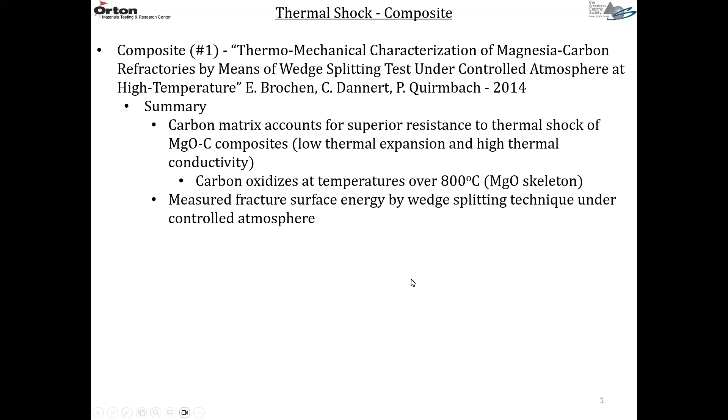These are the carbon matrix composites, and they've been designed to improve thermal shock resistance and corrosion resistance, two of the biggest problems in the refractory industry. So these are really superior materials.

I have three papers today I'd like to go over. The first one is thermomechanical characterization of magnesia carbon refractories by means of wedge splitting tests, under controlled atmospheres as a function of temperature.

This paper is taking the wedge splitting test and adapting it to high temperatures. Basically, these carbon matrix composites have superior resistance to thermal shock. This one I'm looking at today is an MgO carbon composite, which is the primary lining for a lot of steel vessels, especially basic oxygen furnaces. These materials have low thermal expansion and high thermal conductivity. Both of these characteristics give good thermal shock resistance. The problem with these carbon matrix composites is carbon oxidizes at high temperature.

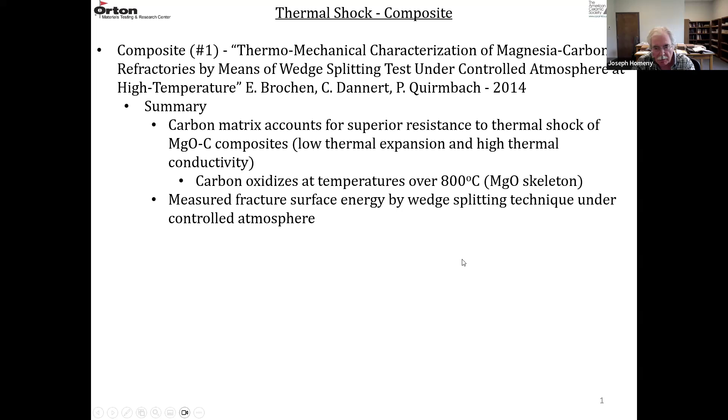This was the chemistry of the material that was looked at. It's about a 96% MgO material—that's the chemistry of the oxide. The loss on ignition indicated there was 13% carbon present, as delivered. The carbon is usually a combination of flake graphite and resin, which is usually a phenolic resin.

This is after the wedge splitting test, at 1500 degrees C. The chemistry is the same for the oxide components, but the loss on ignition is a little bit lower, 10%. So testing at 1500 degrees C is basically coking the material—you're pyrolyzing the phenolic resin binder. There's a little bit less carbon present because of the pyrolysis of the resin.

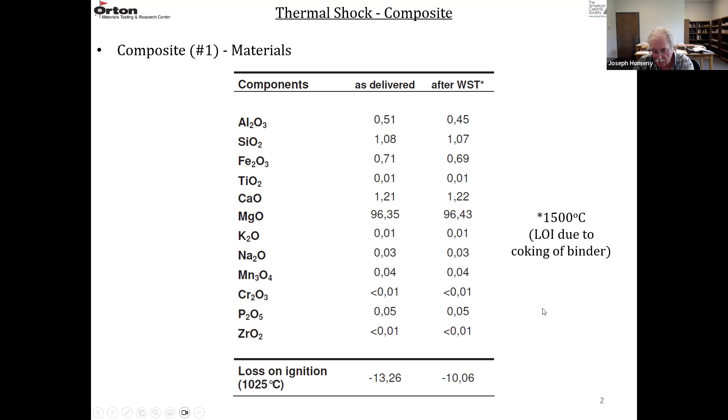The phenolic resin usually has about a 50% carbon yield, so there's usually 5-6% resin in these materials. It lost about 3% during the pyrolysis process. My guess is there's 3% amorphous carbon from the phenolic resin and about 7% flake graphite in this material.

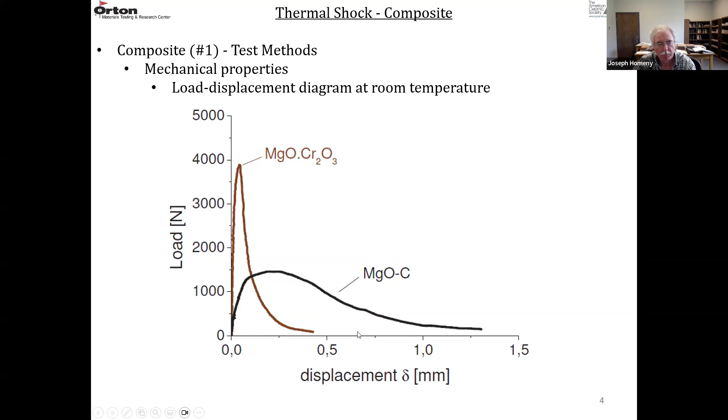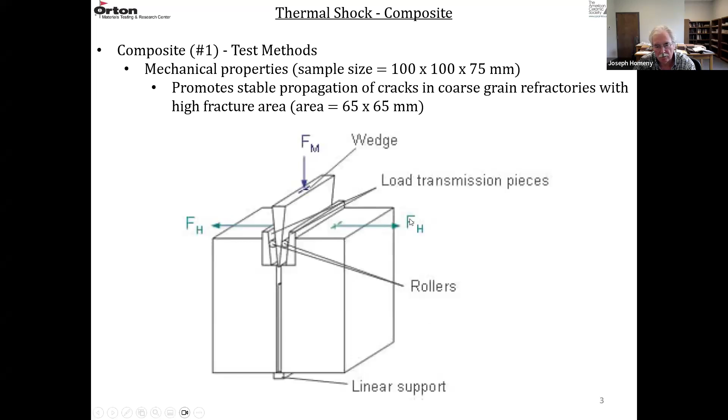So again, the formula for the fracture surface energy, GF, is just 1 over the area, and it's the integral over the force displacement curve—F delta, D delta. F is the horizontal force, delta is the horizontal displacement. So F is this horizontal force.

At room temperature, to get the horizontal displacement, you just use a displacement transducer that monitors the crack opening. Obviously you can't do that at high temperatures because the transducer is not suitable for use at high temperatures.

So in this work, for the elevated temperature test, the wedge sample is put in a furnace. On opposite faces of this furnace there are windows, high temperature windows, most likely a fused silica material that's transparent, or a sapphire single crystal alumina that's transparent. You have to control the atmosphere—it has to be a non-oxidizing atmosphere like nitrogen or argon. You don't want to oxidize the carbon.

And then you can get that horizontal displacement from an optical dilatometer, which can monitor the crack opening as you load the material.

In this work at the lower temperatures, they use a halogen lamp that illuminates the sample and it casts a shadow against the light source, and a high resolution camera records the movement of the shadow. At higher temperatures, where there's enough radiation to see the sample, you don't need the halogen lamp, and you use the radiation of the sample to record the displacement with a high resolution camera.

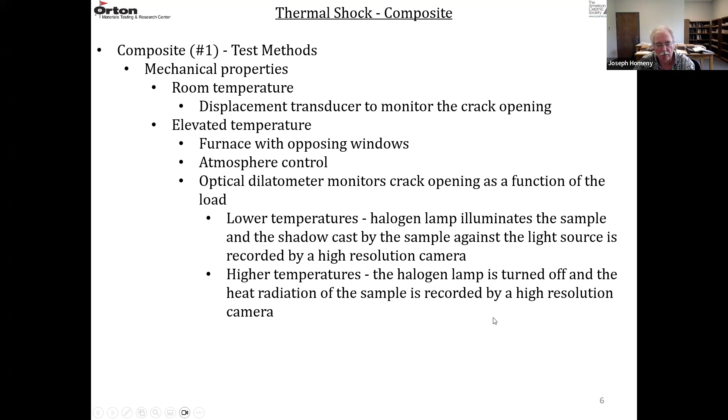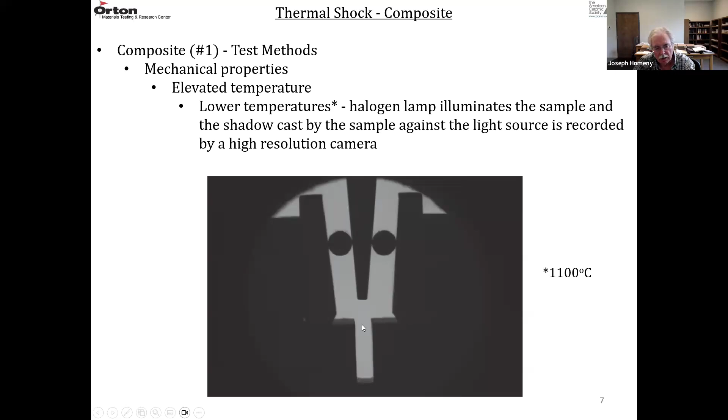So at the lower temperatures, probably less than about 1100 degrees C, the halogen lamp illuminates the sample, and the shadow that's cast is recorded by a high resolution camera. You can see the loading wedge, the cylinders, the transmission wedges, and the notch. As the load is applied, you can get the displacement, the crack opening displacement.

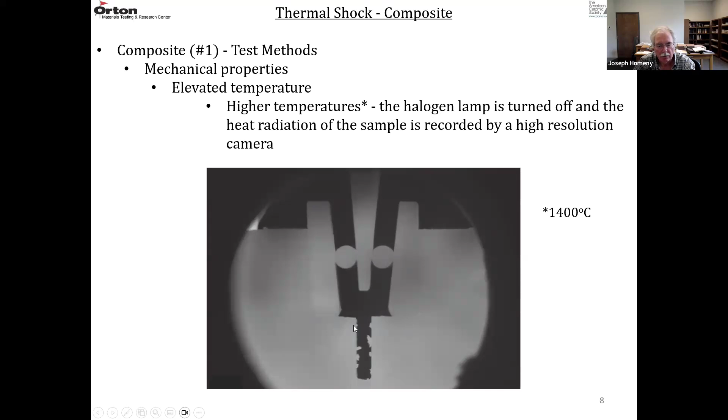Then at higher temperatures, greater than 1400 degrees C, you don't need the halogen lamp, since there's enough heat radiation to see the setup. So this is what you see at higher temperatures. Again, you can see the wedge, the cylinders, the transmission wedges, and the crack. So you can monitor the delta, the crack displacement as you load it.

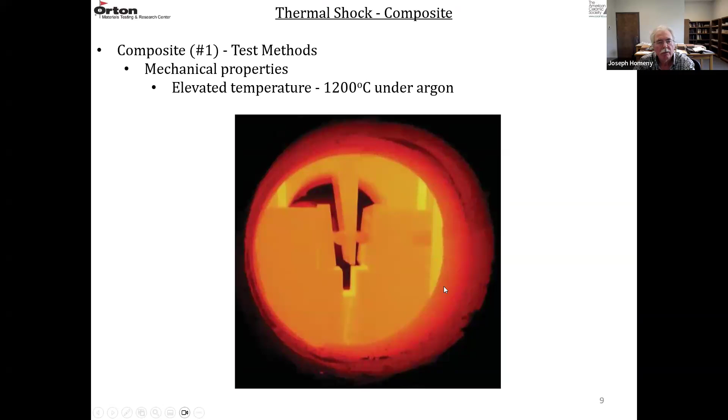This is what the sample looks like at high temperatures, looking through one of the windows in the furnace, a circular window. This is 1200 degrees C under argon. You can see the wedge, the cylinders, the transmission wedges, and the notch. You can actually see a crack that's been propagated from this starter notch.

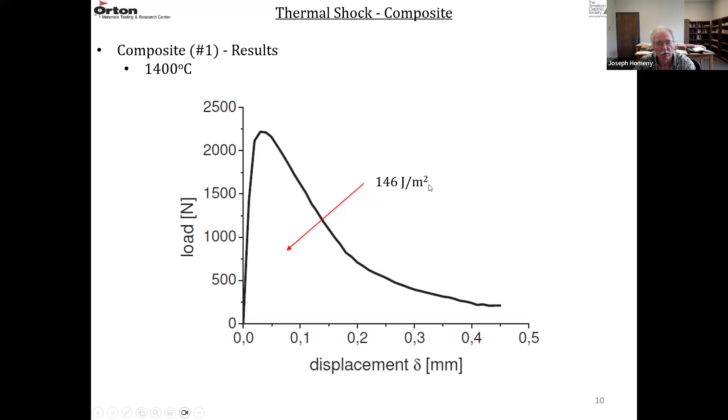So I just showed you this test method, the wedge splitting technique, how it can be used at elevated temperatures for these carbon-based materials. They measure fracture surface energy by wedge splitting under controlled atmosphere up to 1500 degrees C. And we talked a little bit about the pyrolysis of the phenolic resin. If you pre-coke the sample, you can pyrolyze the resin and then you won't have any loss on ignition during the testing.

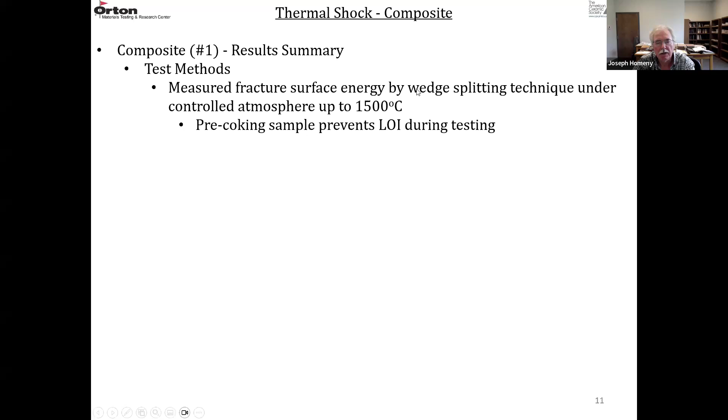So you can do the same type of testing for work of fracture, the chevron notch type sample, but you're also going to need a furnace with a controlled environment.

So I have two other papers today. One shows the influence of the graphite content on the thermal shock. The other one is going to show the influence of the particle size distribution of the oxide. So this one is mechanical behavior and thermal shock resistance of MgO carbon refractories, and we're going to look at the influence of the graphite content. This is a relatively new paper, 2017.

So the thermal shock resistance of an MgO carbon refractory was investigated at different flake graphite contents. They used the wedge splitting test to get the fracture surface energy, and then did some fractography to characterize the crack propagation paths. The thermal shock resistance was correlated to this fracture surface energy measured by the wedge splitting test.

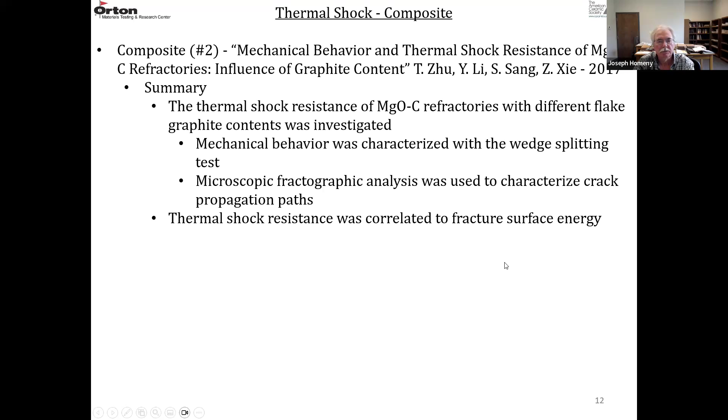So there were several specimens here as a function of graphite content. This is the formula: they have fused magnesia, of course as aggregates, then a finer magnesia powder. The aggregates were kept constant at 70%. The magnesia powder decreased from left to right, and the flake graphite content replaced the magnesia powder.

So we're always looking at a 27 weight percent combination of magnesia powder and graphite. SG1 has 1% graphite and 26% magnesia powder, and then we get up to SG14, that's 14% graphite, and the magnesia powder is reduced to 13%. So 1, 5, 10, and 14% were the flake graphite contents.

There was 1% silicon metal added and 2% aluminum metal, so these are additives. These are anti-oxidation agents, basically oxygen getters. They're there to prevent oxidation of the carbon. Theoretically, they react with the oxygen present before it can react with the carbon.

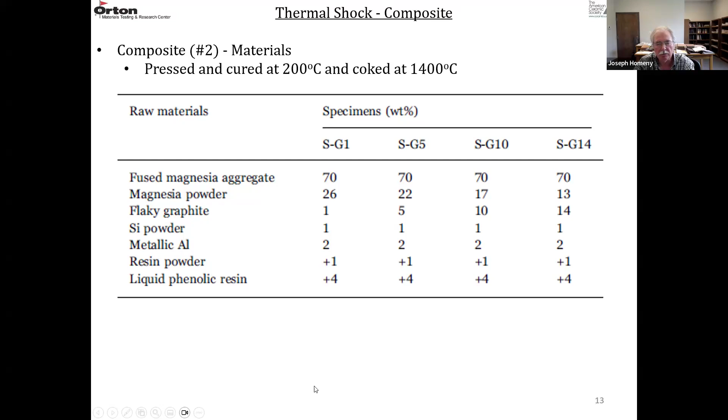Thermal expansion was measured from room temperature to 1400 degrees C, and that has to be done in an inert atmosphere like nitrogen. These were 10 millimeter diameter by 50 millimeter long cylinders. Then the fracture surface energy was measured with the wedge splitting test using the normal size block, 75 by 100 by 100 millimeters.

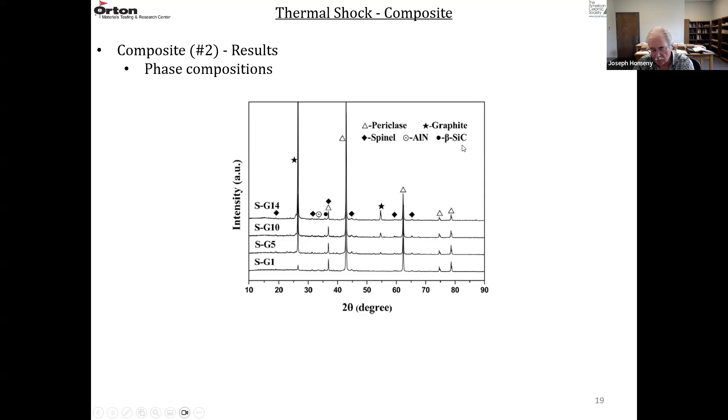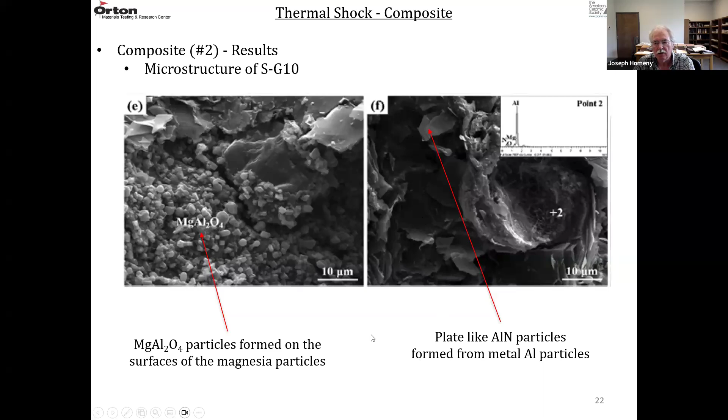You can also see some aluminum nitride platelets forming, and again, this is the EDS analysis showing that these plates are aluminum and nitrogen.

And then the last one, SG14, again, they're showing areas of spinel. Here's an aluminum carbide area, pretty much in whisker form, aluminum carbide whisker.

So again, the spinel is forming on magnesia particles, and here's some more aluminum nitride. This area here is blown up, and you see these plate-like structures of aluminum nitride.

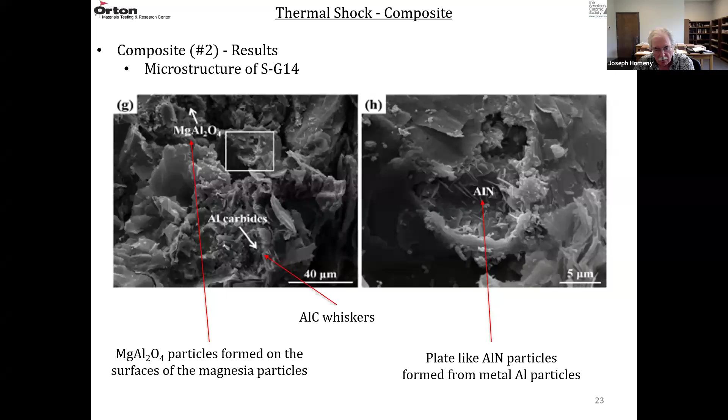So these micrographs are just pointing out the minor phases that are present.

And when they run the wedge splitting test, this is the horizontal force versus the horizontal displacement. You have this nonlinear fracture behavior that becomes more nonlinear as the graphite content goes up. So this is SG1, SG5, SG10, and SG14. So the higher the carbon or graphite content, the lower the strength, but the bigger the area under these load displacement curves, and the more nonlinear the behavior becomes with higher graphite content.

So SG1 is pretty linear. It's the most brittle. And then SG14 is the most ductile or the most nonlinear. So these curves really change as you increase the graphite content.

So just looking at these curves, you would say going from G1 to G5 to G10 to G14, in that order, those should be more thermal shock resistant as you go up in graphite content.

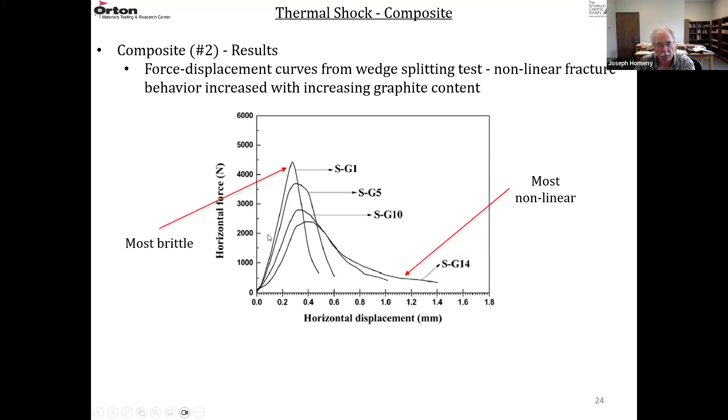And then this is common, the fracture surface energy divided by the sigma NT, this notched tensile strength. So that ratio is shown here, plotted against graphite content. It increased with increasing graphite content. So the higher this ratio, the higher the ratio of the fracture surface energy to the tensile strength, the lower the brittleness, the higher the toughness, the better the thermal shock resistance.

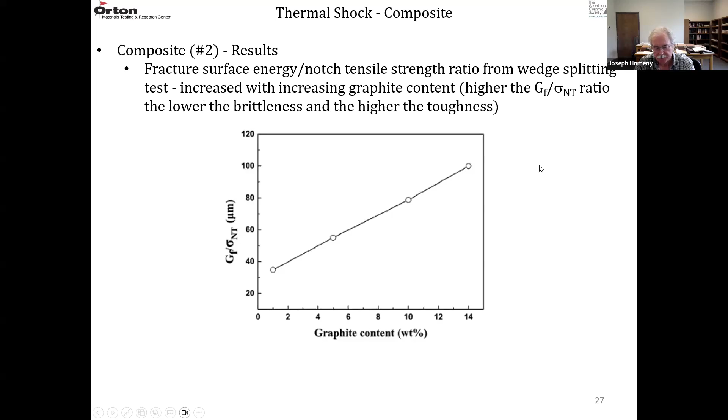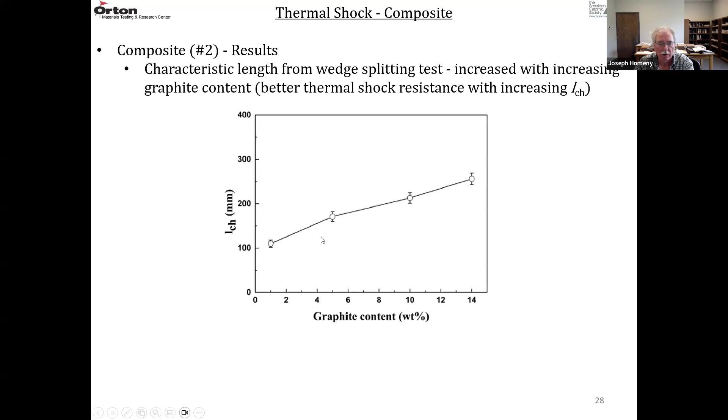They also plotted the characteristic length from the wedge splitting test, and again, that increased with the increase in the graphite content. So the higher the LCH, the higher the characteristic length, the better the thermal shock resistance. And that's following R4 prime.

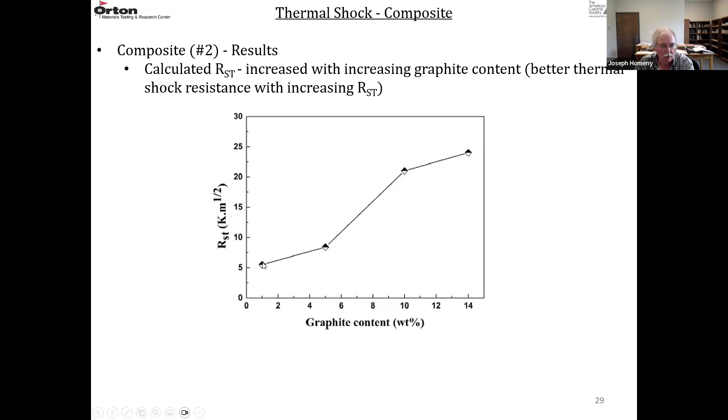They also calculated RST, and they showed that RST increased with increasing graphite content. So the higher the value of RST, the better the thermal shock resistance. So all of these tests are showing that the material with the highest graphite content, 14%, should have better thermal shock resistance compared to the material that is only 1% graphite.

So this is the thermal shock test results. You have room temperature bend strength before and after thermal shocking, and the residual strength ratio is also shown. So cold MOR before and after shocking. The darker cross-hatched area is the cold MOR before thermal shocking, and this lighter single line area is the cold MOR after thermal shocking.

So you can see that the lower graphite material was stronger before thermal shocking, but actually the higher graphite material had a higher residual strength, just slightly higher than these other materials at lower graphite contents.

So this is the residual strength ratio, this plot here. So the higher residual strength percentages are at the higher graphite contents. This upward trend is the same trend as with LCH, RST.

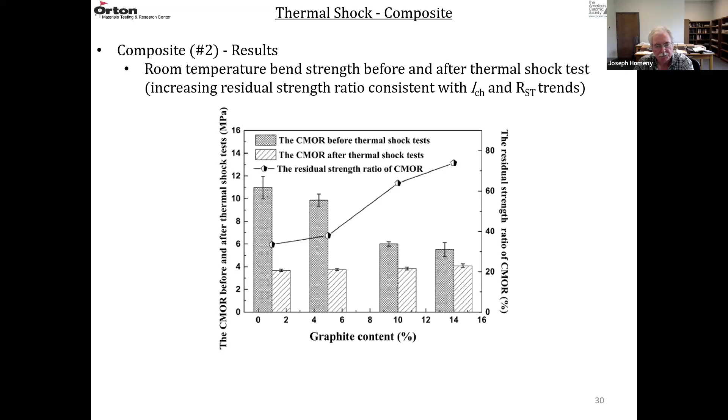What matters is that after thermal shock, it still retains most of its strength, that's still there in service. So this is the material.

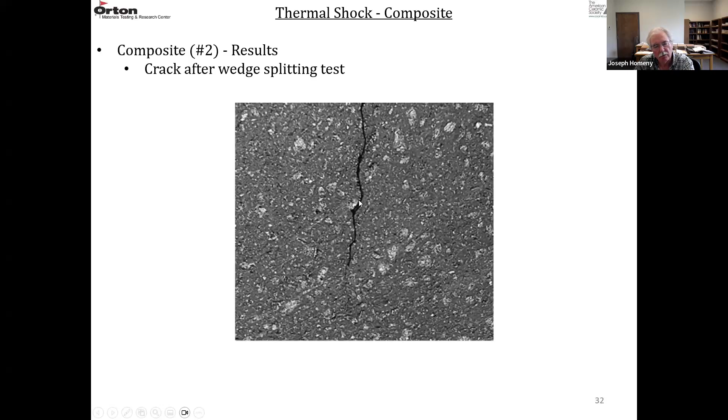This is a higher magnification of that crack that's growing. You can see there's some deviation from linear behavior. There's a MgO aggregate that went around. And then they modeled this.

So they took an image of this crack, its crack path, and they used a fractal analysis of that crack image. And they got a fractal dimension D. That fractal dimension D describes the behavior or nature of that crack path. So the higher the value of this fractal dimension D, the more tortuous the crack propagation path.

The higher the D value, the more tortuous the crack path, it should have higher thermal shock resistance, the higher work of fracture. So D increased with increasing graphite content. So that predicts better thermal shock resistance with increasing D. This is that fractal dimension D versus graphite content, and it increases with graphite content, meaning that crack path is more tortuous. And the more tortuous the crack path...

You do that by controlling the microstructure, the better the thermal shock resistance.

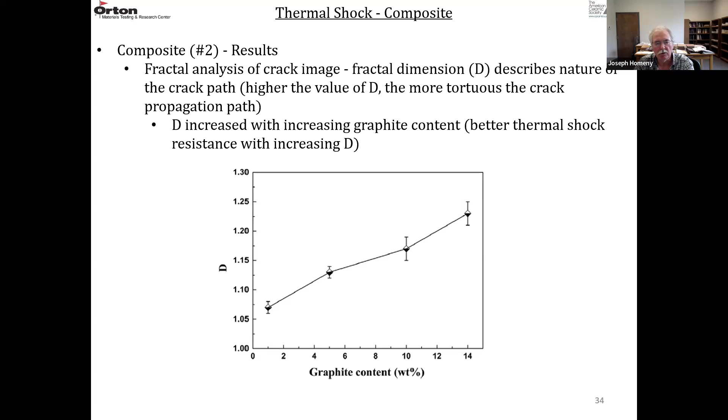So they looked at the crack propagation types. You can have crack propagation within a grain, within an MgO grain. They label that CGG. You can have crack propagation between the grain and the matrix. They label that CGM. And you can have propagation of cracks in the matrix. That was CMM. So GG is in the grains, GM is at the interface, and MM is in the matrix.

And then they looked at the length in the whole crack propagation path for each one of these types of crack propagation behaviors. So they had a capital L CGG, a capital L CGM, and a capital L CMM. This was propagation within grains, propagations at the interface, and propagation in the matrix.

And then they got a percentage here, the corresponding proportions of each one of these crack paths relative to the whole crack path. So small l is the portion of the crack that went through coarse grains. This small l GM is the portion of the cracks that went through the interface. And this small l MM is the portion of the crack that went through the matrix.

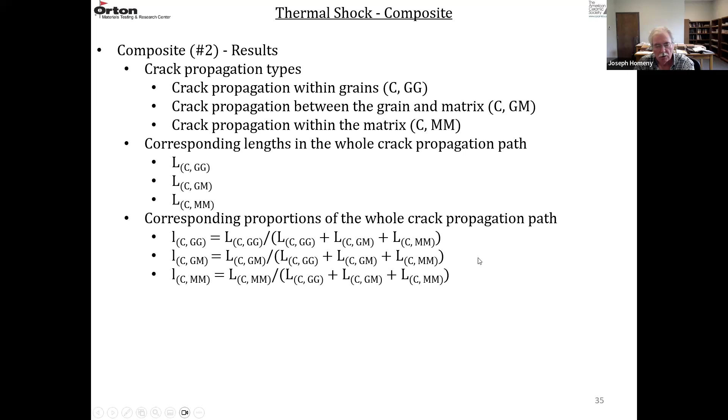So this is just the sum: capital L GG, capital L GM, capital L MM. So this is the total length of the crack. And then this is the length of the crack that was through the coarse grains. This is the length through the interface. And then this is the length through the matrix. So they were able to look at how this crack was moving through the material.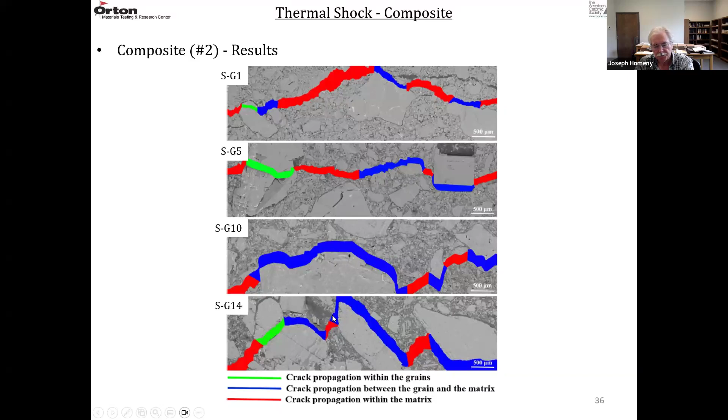So they looked at these values here: the proportion in the coarse grains, the proportion in the interface, and the proportion in the matrix for all 4 of these. So the crack propagation path became more tortuous as the graphite content increased. So this is in the coarse grains. SG1, 6 or 7% of that crack path was through an MgO grain. But if you go across the higher graphite contents, it's down to 2.8%.

And then through the interface, it starts out at 35% with the SG1, but as you go across this table to the higher graphite, it's now up to about 73%. So a totally different fracture path in the SG14 compared to the SG1. And then the matrix, it was 58% SG1 and it decreases to 24% in SG14.

Then they made a ratio of the interface relative to the coarser grains. And that ratio increases from SG1 to SG14. So what is that telling you? In the high graphite content material, the interface is really important.

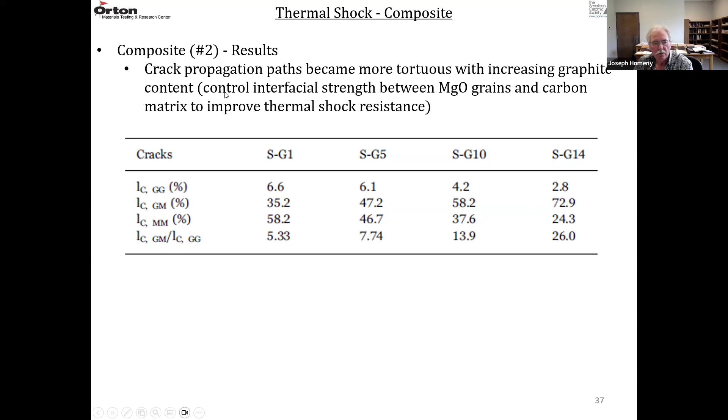So you can try to control the interfacial strength between the MgO grains and the carbon to improve the thermal shock resistance. So that's one of the key findings here, is that you want to control that strength, because that's the main crack propagation path. So if you have a very strong interfacial strength between the matrix and the MgO grains, that path is not going to be that active. If you have a weaker interface, that fracture path will be more active. So you want to control that interfacial strength.

So the summary of this experiment: increased graphite content enhanced the irregularity of the crack propagation path. It made a more tortuous fracture path, and that improved the thermal shock resistance because of this more tortuous propagation path.

As far as the test methods, as you increase the graphite content, you increase the nonlinear fracture behavior, you increase the ratio of fracture surface energy to tensile strength, you reduce the tensile strength, you increase the fracture surface energy, you increase the characteristic length LCH, basically R4 prime, and you increase the thermal shock damage parameter RST.

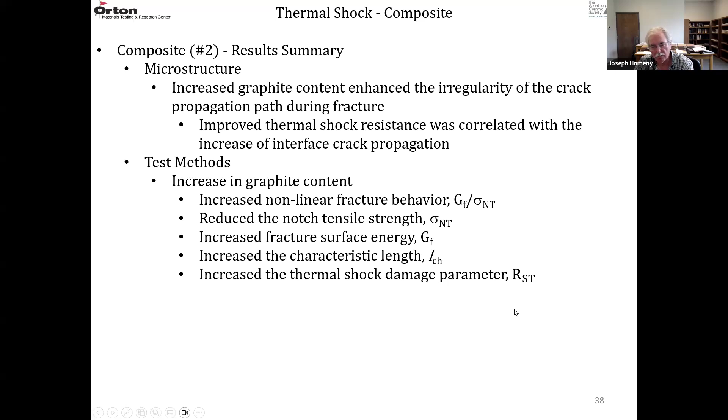So that was a study showing the effect of graphite content on thermal shock behavior. This other paper I picked shows the effect of particle grading on the fracture behavior and thermal shock resistance of these MgO carbon composites. This is a 2022 investigation.

They looked at the thermal shock resistance of an MgO carbon refractory with two different particle size distributions, a fine distribution and a coarse distribution. They used the wedge splitting test to measure the mechanical behavior, but also added digital image correlation of the fracture pattern and acoustic emission, trying to characterize the fracture behavior in more detail.

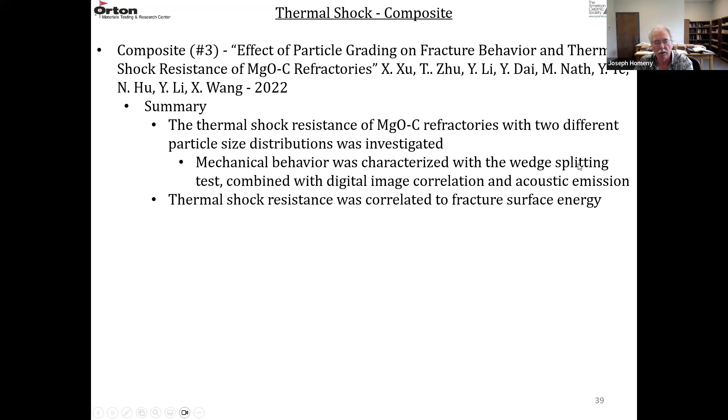And they correlated the thermal shock resistance to the fracture surface energy from the wedge splitting test. So they had two compositions, the C12 and an MC12. The C12 was the coarser distribution, the MC12 was the finer grain size distribution.

They used fused magnesia, a dense, low porosity magnesia at three different particle sizes: 3 to 1 millimeter, 1 to 0.2 millimeters, and 0.2 to 0 millimeters. The flake graphite was 100 mesh.

They added aluminum metal as an oxygen getter, an antioxidation agent. They also added B4C, which is also an antioxidation agent, but it works a little differently than the metallic antioxidation agents.

The B4C oxidizes and leaves a B2O3 glass, which coats the carbon and acts as a diffusion barrier. Obviously, if you create a glass, you lower some of the mechanical properties. So in a way, this is a good oxidation barrier, but it does lower the strength.

The resin was a phenolic resin, a powder and liquid proportion at 4.5%. The flake graphite content was 12%, constant. The antioxidation agents were constant: 3.75 for aluminum metal and 0.5 for boron carbide.

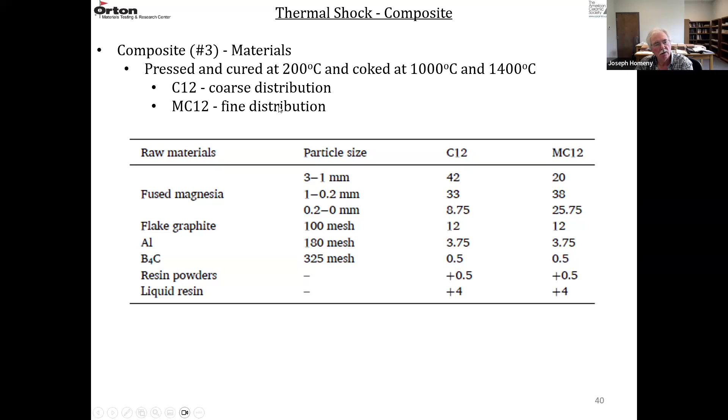They used a 3-point bend strength test, typical bend bar size, 25 by 25, 140 millimeters. They measured Young's modulus by a resonance technique. Thermal expansion was measured up to 1,400 degrees C under nitrogen with smaller cylinders, 10 millimeters by 50 millimeters long, 10 millimeters in diameter. And the fracture surface energy was by wedge splitting on the typical sample size.

But they use digital image correlation, so they monitor the initiation and propagation of cracks on the surfaces of the wedge splitting block. They also use acoustic emission, which detects the crack location, crack mode, and damage evolution as the sample is loaded and as the crack propagates.

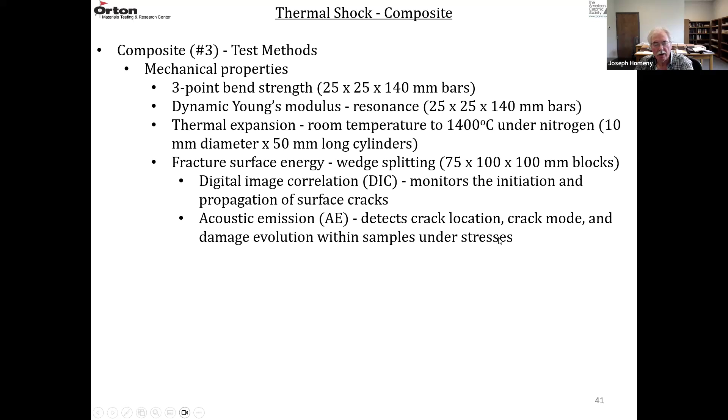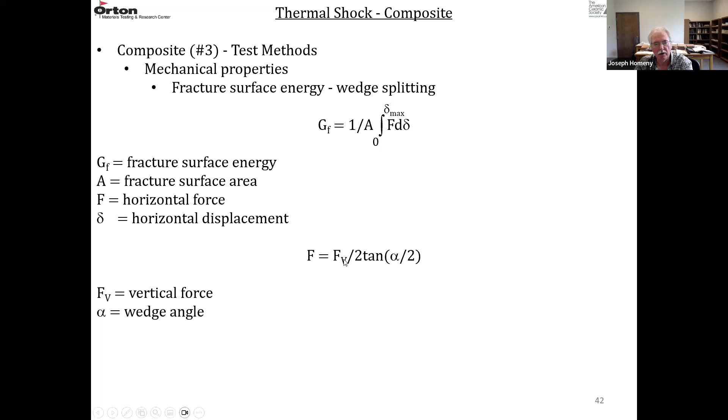I'm just reviewing these equations again. This is the wedge splitting fracture surface energy, GF, equal to 1 over A times the integral of F d delta. And F here, emphasize that it is the horizontal force, while FV is the vertical force when you apply the force of that wedge. So F is calculated from FV, the vertical force, divided by 2 tangent of alpha over 2, where alpha is the wedge angle.

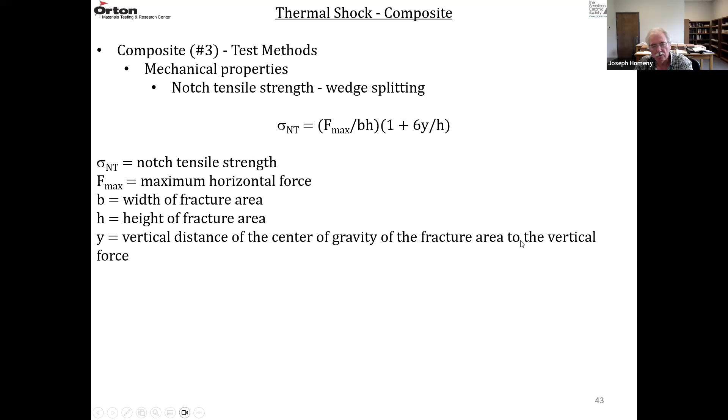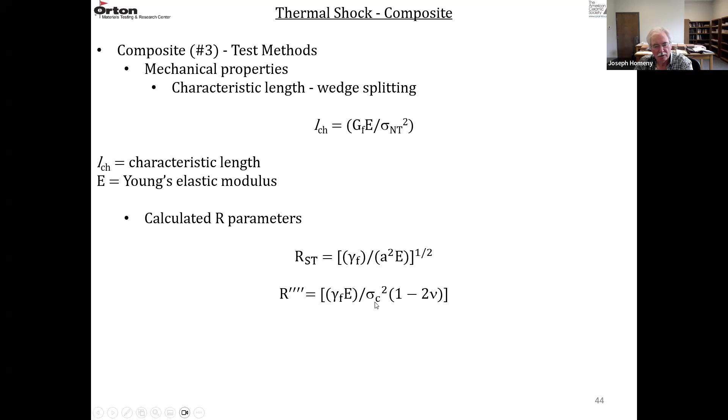And then again, LCH, the characteristic length, is GF times E over sigma NT squared. And that's basically your R4 prime parameter.

These bars that were subjected to thermal shock were the ones that were coked at 1,400 degrees C, so the phenolic resin is pyrolyzed into carbon.

Typical quenching conditions: 900 degrees C to an oil bath at 20 degrees C. Samples cycled 5 times, and then the bend strength was measured to monitor the damage.

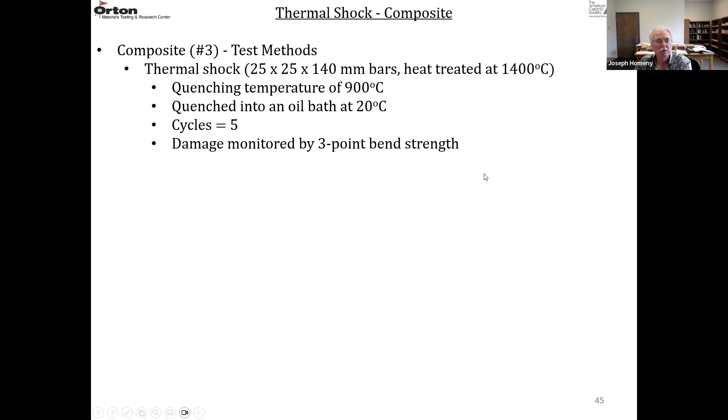The boron carbide was too low a level to detect at the 200 degrees C curing. And then the MC12 is basically the same, primarily periclase and graphite at either curing temperature, some aluminum metal at 200 degrees C curing, and then you're going to get a little aluminum nitride and spinel at the 1400 degrees C curing.

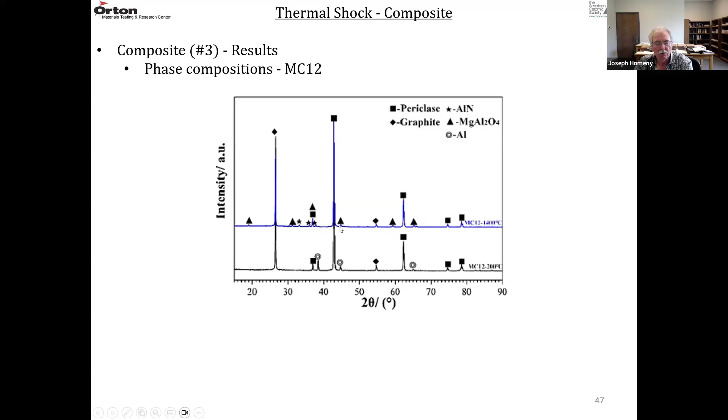And pretty much the same thing for MC12 at 200, 1400, and 1400. You can see the flake graphite. There's some aluminum metallic spheres here.

The aluminum nitride whiskers that have formed, the spinel that has formed, and this is just another micrograph of more spinel that's forming. These are identified with EDS, so these features you can see the chemistry and identify what they are.

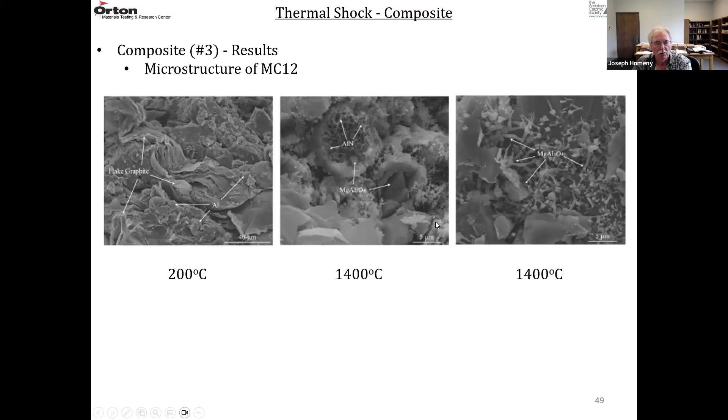So as you go up in temperature, the strength decreases, but the material becomes less brittle, more ductile, and then these areas under these curves start to increase. So the nonlinear fracture behavior increased with increasing temperature.

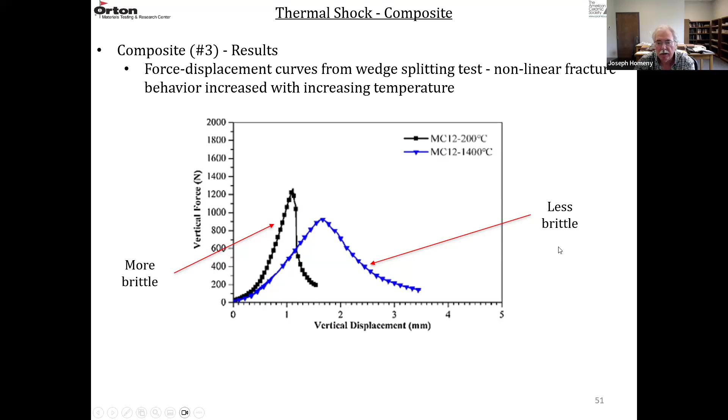And the same behavior for MC12. The black is at 200 degrees C curing. The MC12 in blue is after 1400 degrees C curing. So at room temperature, these tend to be more brittle, and as the temperature increases, they become less brittle or more ductile. So the more ductile they become, the more strain they can take, and the better they can resist thermal shock.

So this is the porosity and density. AP is the apparent porosity, BD is the bulk density. This is the curing temperature, 200, and this is the other curing temperature, 1400 degrees C.

So C12 and MC12, both 5.5%, 6% porosity at 200. And then the bulk density is basically the same, about 3, and that's grams per cubic centimeter. And then at 1400, the porosity, this is 10.5, this is 11, they're almost identical, and the bulk densities 2.88 and 2.87 are almost identical.

So when you cure this from 200 to 1400, you pyrolyze the phenolic resin. You have let's say a 50% carbon yield, then you have a 50% loss on ignition of that resin. So the porosity goes up, from about 5 to 10, 6 to 11, and then the density drops from about 3 to 2.88 and about 3 to 2.87. So the pyrolysis step or the coking step increases the porosity and decreases the density.

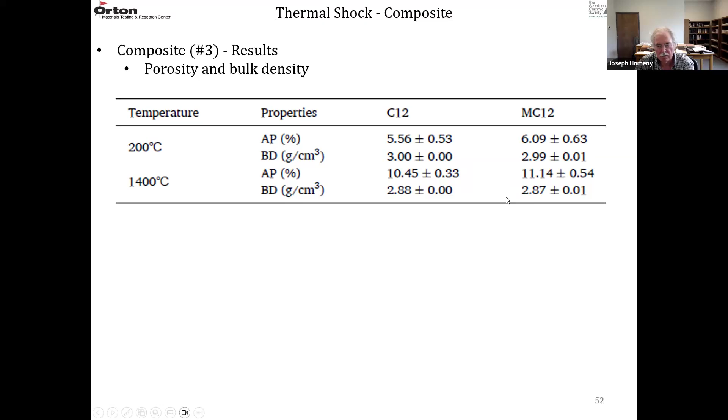So these are the results from the wedge splitting test. So the increase in heat treatment temperature from 200 to 1400 resulted in an improvement in the predicted thermal shock behavior.

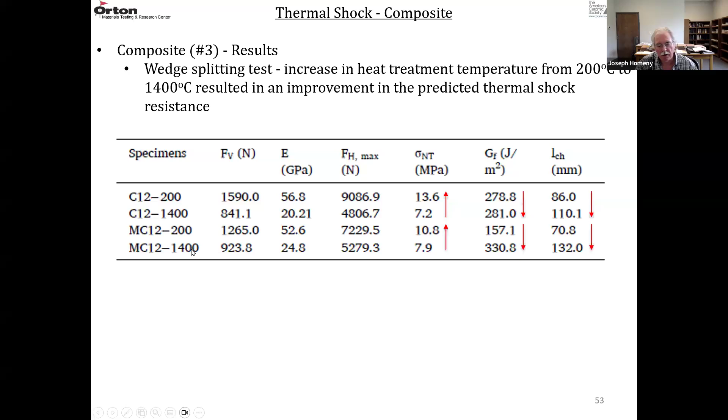So they're stronger before they're coked, but the fracture surface energy increases after coking. This one is a slight increase, but for the finer aggregate material, it almost doubles. So the fracture energy really goes up at the higher curing temperature for the finer aggregate size material. The characteristic length also increases as you raise the curing temperature from 200 to 1400. This one's pretty modest, 86 to 110, but this one again almost doubles, 70 to 132. So this is saying that MC12, the finer grain size distribution, should have better thermal shock resistance.

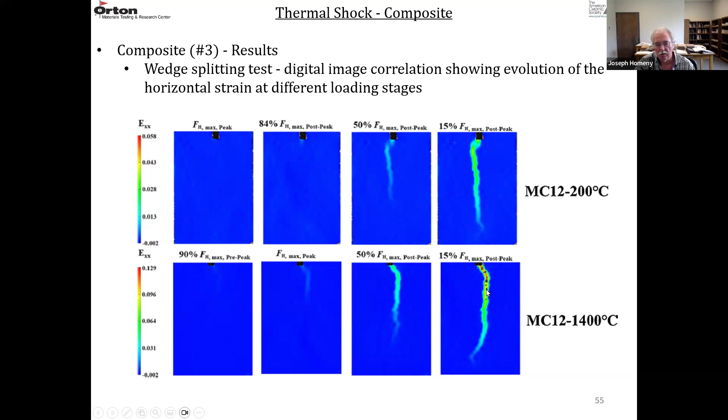That was at 200 degrees C. This is at 1400 degrees C, and you can see the crack path is kind of tortuous, not linear at all. This is the evolution of the crack in the MC12 material at 200 and 1400 degrees C. Again, here are the peak levels, and here's where the crack starts to grow after the peak. Down to 15% load, you can see the crack patterns.

So these digital images give you the horizontal strains. The higher the strain, the better the thermal shock resistance. The more strain the material can take under stress, the lower the amount of damage that takes place. So these are samples, C12 and MC12 at the two different curing temperatures, 200 and 1400 degrees C. This is at 90% of the pre-peak load, 94% of pre-peak, at the peak, 94% post-peak, 84% post-peak, 50% post-peak, and then 15%.

So if you look at these numbers, the strains: this is 1.29 times 10 to the minus 1, this is 1.12 times 10 to the minus 1. These are pretty large strains post-peak on the samples cured at 1400 degrees C. The strain is a little bigger in the finer material. Then there's a lot less strain: 5.84 times 10 to the minus 2, 4.17 times 10 to the minus 2. These are for the 200 degree C cures. So coking the material at high temperatures increases the amount of strain to failure.

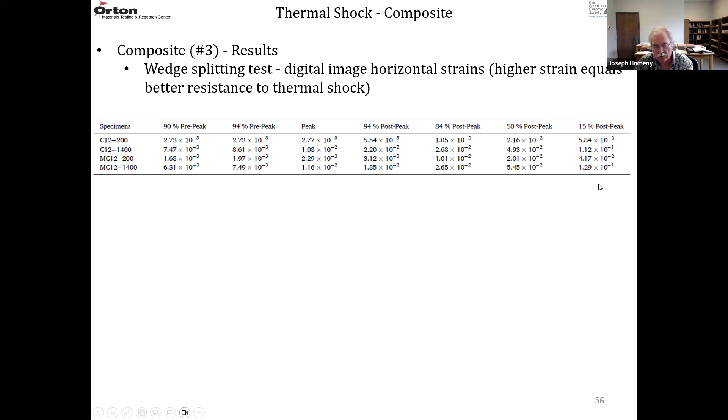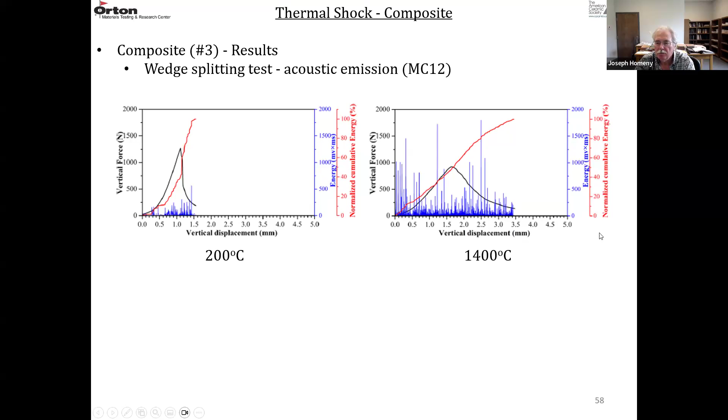So this height or frequency of these acoustic emissions can be correlated to a fracture process. On this curve is the peak frequency versus time during the wedge splitting test. This first dotted red line -- anything below that line is just background noise. Below the second dotted line, in the region between the two dotted lines, those acoustic emissions are characteristic of a crack propagating in the matrix. Above the other top red line, those peaks are characteristic of a crack propagating in a grain. So they can use acoustic emission not only to see how much fracture is taking place, but the magnitude of those events, splitting it into fracture within a grain or fracture in the matrix.

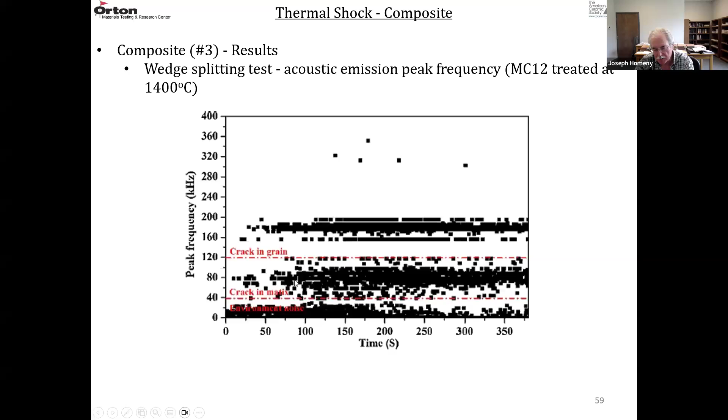So they can get a percentage: the cracks in the particles, capital P%, and the cracks in the matrix, capital M%, and take the ratio of P over M.

So cracks in the particles for C12 at 200-degree curing: it's 16% particle cracking and 83% in the matrix. Then when you go up to the higher temperature after it's coked, more particles are cracking and less fracture in the matrix.

And then the MC12, the finer material, you're starting out with 10% relative to 16, so there's less coarse particle fracturing in the finer material and more matrix fracturing. This is 89 relative to 83.

And then at the higher temperature, 1400 degrees C coking, about 26% of the particles are fracturing, but it's still less than in the coarse material. And then 73% of the fractures are in the matrix, which is higher than in the coarser material.

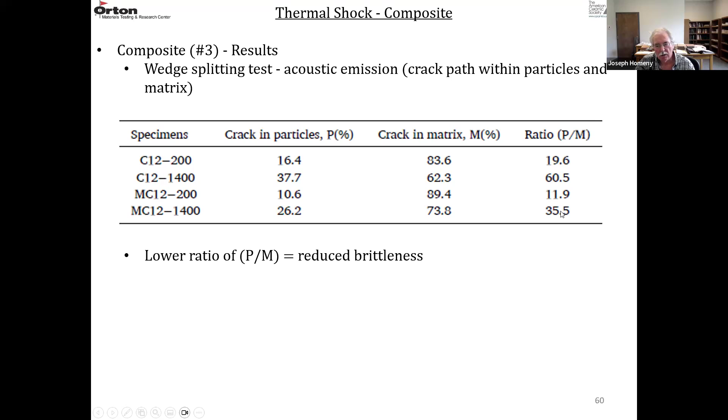So when you look at the ratios, this is 19 at 200, this is 11, this is 60 at 1400, this is 35. So the lower this ratio, the less brittle the material is. So these ratios predict the MC12 is better in thermal shock.

So finally, when they do the thermal shock testing, this is the CMOR before and after thermal shocking, and then the residual strength here in blue. C12 is the coarser material, MC12 is the finer material.

Actually, the finer material is stronger before thermal shock testing because the coarser material obviously has the coarser particles, which gives bigger flaws and lowers the strength. So MC12 has better initial strength and more retained strength.

It retains 75% of its strength after thermal shocking. C12 only retains 68%. But you can look at the difference here after thermal shocking - it's what's really important. This strength is much higher, actually, than either one of these strengths before and after thermal shocking.

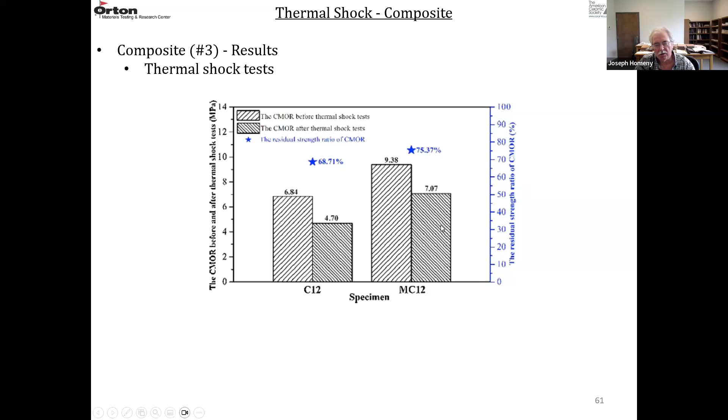So what we predicted, MC12 should be better, and it actually is in these thermal shock tests.

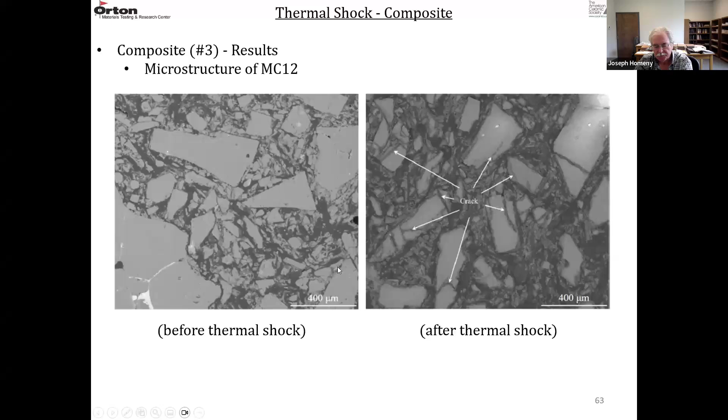And that fracture behavior showed up in the acoustic emission also.

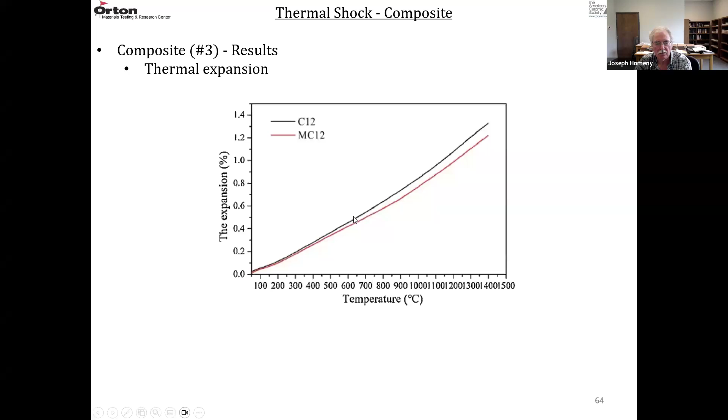They measured the thermal expansion, C12 versus MC12. The finer material is in red. So going to a finer grain size actually lowered the thermal expansion of the composite a little bit, which also enhances the thermal shock behavior. Any material that has a decreased thermal expansion will have better thermal shock behavior.

So in this work for the microstructure, the MgO carbon refractories that were made with the finer particle size distribution - that was the MC12 - were less brittle than the refractories produced with the coarse particle size distribution.

And the refractories produced with the finer particle size also exhibited a bigger strain under the various loading stages than the refractories with the coarse particle size distribution. So they can withstand greater strain - they're going to better resist thermal shock fracture.

And then for the test methods, the refractories produced with the finer particle size distribution created more microcracks in the matrix and at the matrix particle interfaces, and it consumed more energy than the refractories produced with the coarse particle size distribution. These composites made with the finer particle size distribution also have increased interfacial area because of the finer MgO particles that tended to reduce the stress concentrations, increase thermal shock resistance, relative to the coarse particle size materials.